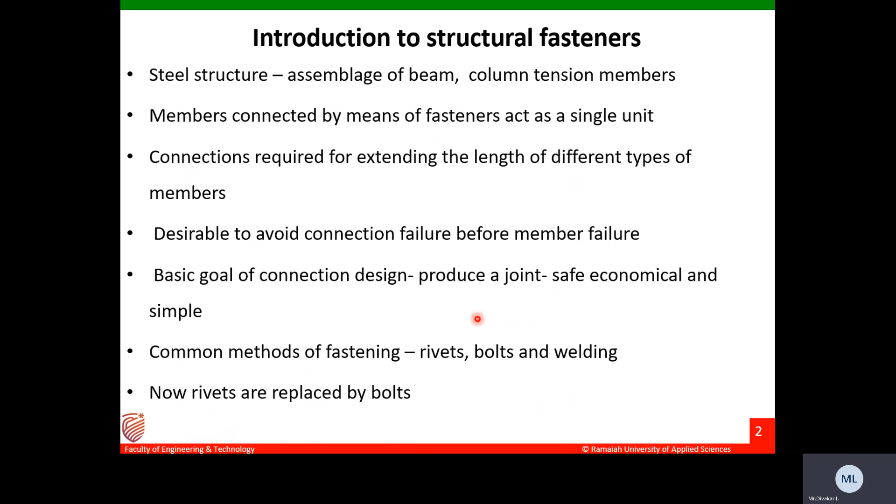If you want to give connections from beam to column or column to beam, we can use fasteners. If you want to provide the joint between the beams and columns, I can give bolt connections here. So beams and columns can be jointed by bolt connections.

Similarly, here you can see beam passing through beam, and beams connected by welding. Here beams and beams are connected by the weldings, as you can see at this point.

If you want to extend the members, what type of connections can we use? I can go with welded connections or bolted connections. Here you can see connections of two members using bolted connections.

In trusses, usually the connection is provided by using weldings. The tension members and compression members in trusses are connected by the welding process, though we can also use bolted connections there. This is how we use connections in steel structures.

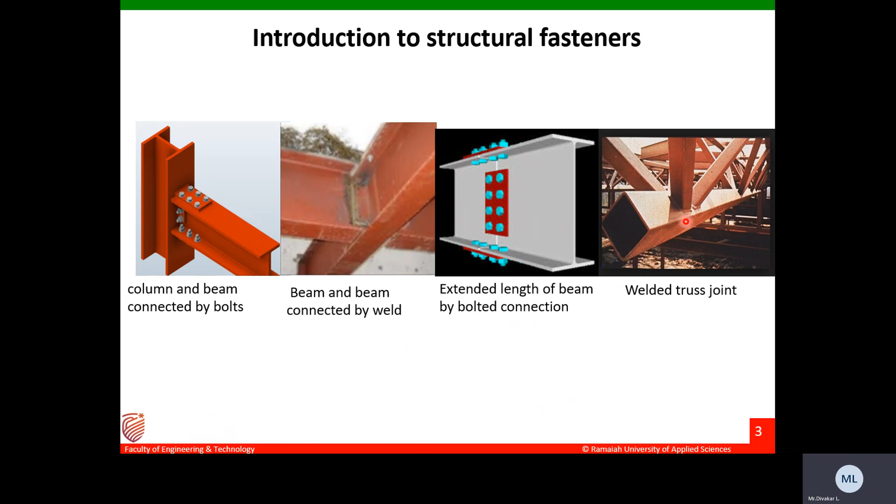Next, why connection failure should be avoided. If you are providing the connection, we need to take care that the connection failure should be avoided, because connection failure leads to catastrophic failure of the whole structure.

The connection failure is not as ductile as steel member failures. This is very important: connection failure is not as ductile as that of the steel members. The ductile property will be reduced and it behaves in a brittle kind of manner when compared to the steel members. At the connections, especially in the welding we provide, the failure type you observe is brittle failure.

Then, to achieve an economical design, connectors should develop the full or a little extra strength of the members being joined.

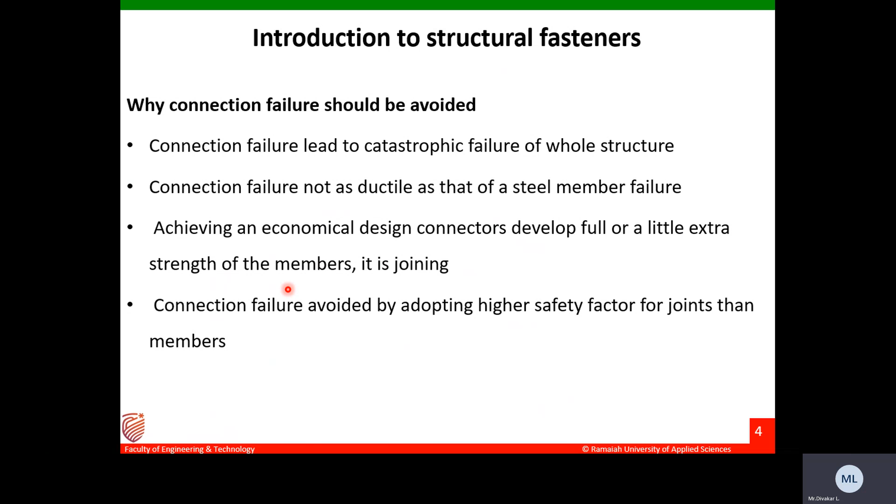Achieving an economical design, connectors develop full or little extra strength of the members. This is joining. Connection failure is avoided by adopting a higher safety factor for joints than for the members, so we can avoid these connection failures by using higher safety factors at the joints.

Next, classification of connections. There are different types of connections used in steel structures, with different methods of fastening. As said earlier, the first ones are rivets, bolts, and weldings. Now rivets are replaced by bolts, so commonly we use bolts and weldings.

Connection rigidity can be simple, rigid, or semi-rigid. Based on joint resistance, connections can be classified as bearing connections and friction connections.

Fabrication locations: shop or field connections. This refers to where you are fabricating the elements or joints - whether shop or field connection - and this should be taken care of. For example, in welding, you need to take care whether it is done in the field or in the shop.

Joint locations: beam to column, beam to beam, or beam to foundation. Based on this, we can classify the connections.

By method of fastening, we classify rivets, bolts, and weldings. Based on connection rigidity, we classify simple, rigid, and semi-rigid. Based on joint resistance, we classify bearing connections and friction connections.

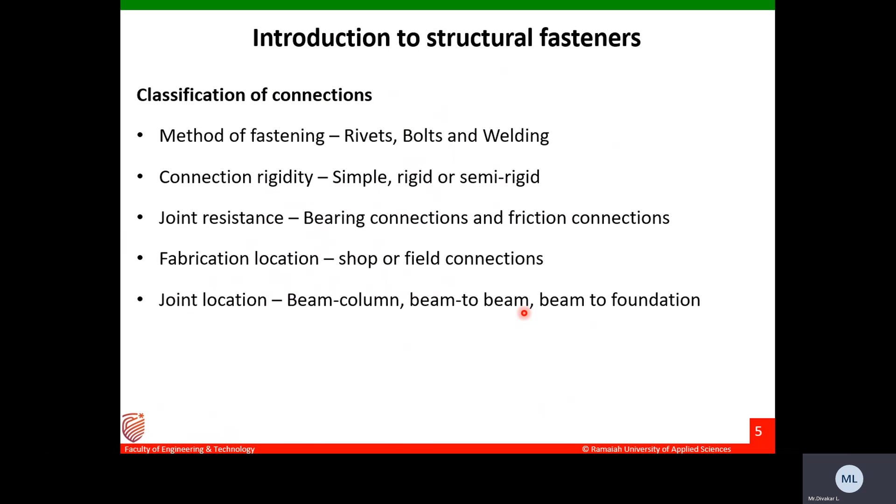Here I've shown a flow chart for classification of connections: simple connections and eccentric connections, bolted connections and welded connections. In bolted connections, there are common bolts and high strength bolts - these are the two commonly used types. Among high strength bolts, there are slip critical and bearing types. In welded connections, there are fillet weld and groove weld. This chart shows the two types of connections.

One type is eccentric connection, which I can also call bracket connections - eccentric connections are bracket connections.

Simple connections include bolted connections and welded connections. In bolted connections there are common bolts and high strength bolts, and among high strength bolts there are slip critical and bearing type bolts. In welded connections there are two types: one is fillet weld, another is groove weld, sometimes also called butt weld.

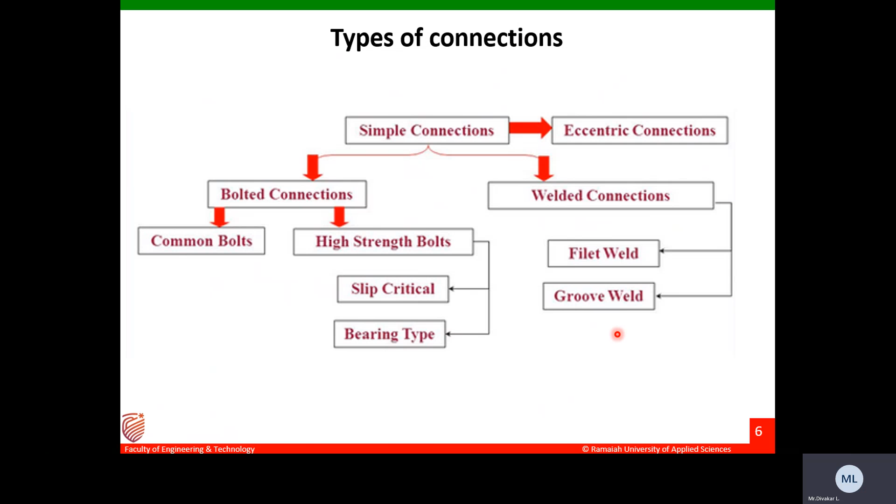Now let us look at bolted connections. What do you mean by a bolt? Let's concentrate on bolted connections first. A bolt is defined as a metal pin with a head at one end and a shank threaded at the other end to receive a nut.

You can clearly see this is the head, and this is the bolt - the total assembly is called a bolt. Here you can see the head, and this portion is usually called the shank.

This portion, from here to here, is usually called the shank. This is non-threaded shank and this is threaded shank - you can see the threads provided here. Shank portion is threaded at another end. Usually bolts are half threaded and half non-threaded, so the non-threaded portion is called shank, and the total portion is called shank, while the other part is the threaded portion.

In bolt assembly, if you take the total length of the bolt, this is called a nut, and these two are called steel washers. Washers are provided before putting the nut on, to get a better grip. So this is the total bolt assembly - here to here is the bolt length.

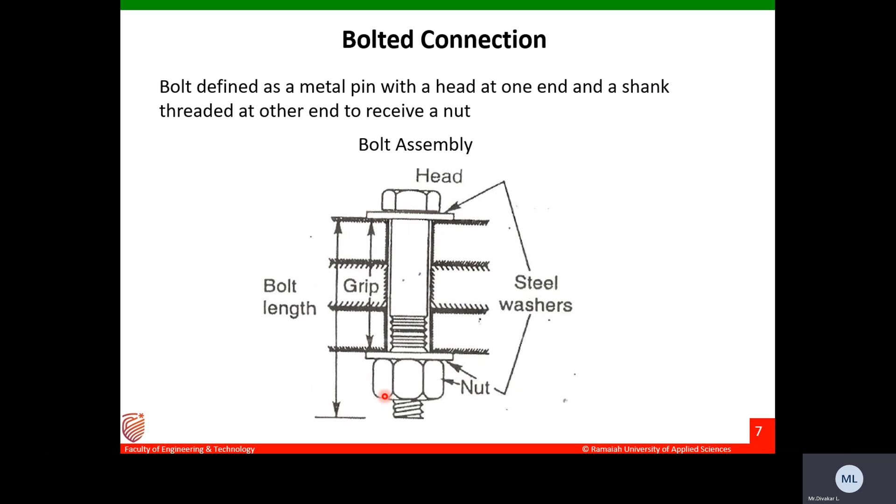Next, classification of fastener holes - this is given in Table 19 of IS 800:2007. What clearance should be provided for fastener holes? That should be known. Bolt holes are usually drilled, and bolt holes are made larger than the bolt diameter - this is very important.

Usually bolt holes are made larger than the bolt diameter - we need to take care of this. Why provide a larger diameter hole? Because it facilitates proper erection, and allows for inaccuracies in fabrication.

For example, take an 8mm bolt. While fabricating, there may be a slight change in diameter - it may be more or less than specified. To allow for these inaccuracies, the diameter of the hole should be kept slightly larger than the diameter of the bolt.

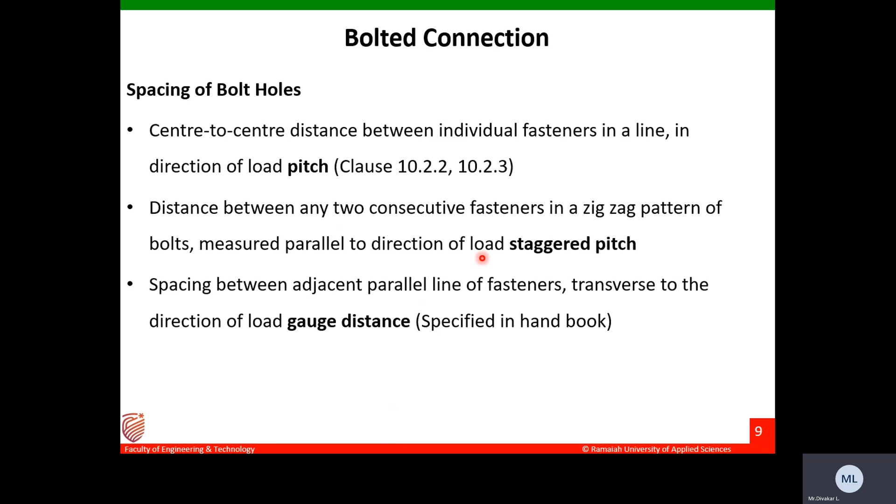Okay, gauge distance. Then edge and end distances of the bolts. Distance from center of a fastener hole to edge of element measured at right angles to the direction of load. Direction of load at the edge distances. This is placed in clause 10.2.4.

So you can see this is called edge distances. This is measured perpendicular to the direction of the loads. End distance is measured parallel to the direction of the loads, or in the direction of the load.

The distance from center of a fastener hole to the edge of an element measured at right angles to direction of the load is called edge distance. Then distance in a direction of load from center of a hole to end of an element is called end distance. It's very important.

So you need to remember this, it is very important. What is the end and edge distances while doing design? These are all the main important parameters you should remember.

What is that? Distance from center of a fastener hole to the edge of an element measured at right angles to the direction of a load. This is called edge distance, measured perpendicular to the direction of the load.

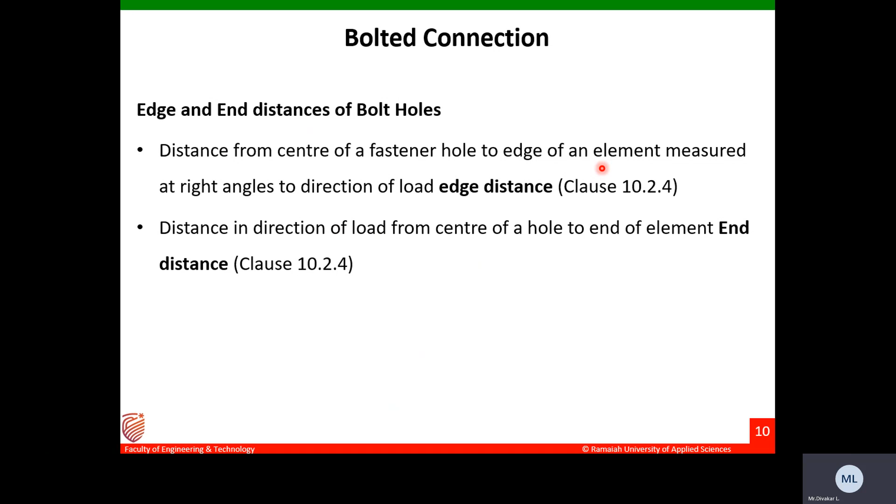Don't get confused between edge distance and end distances. This is given in clause 10.2.4 of the IS 800 book. We can go through it to clearly see what is the pitch, end distances, gauge distances, and edge distances.

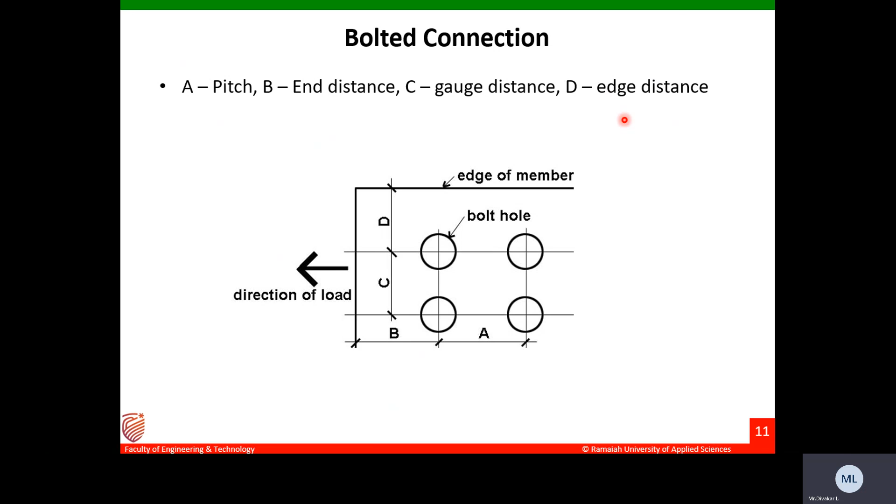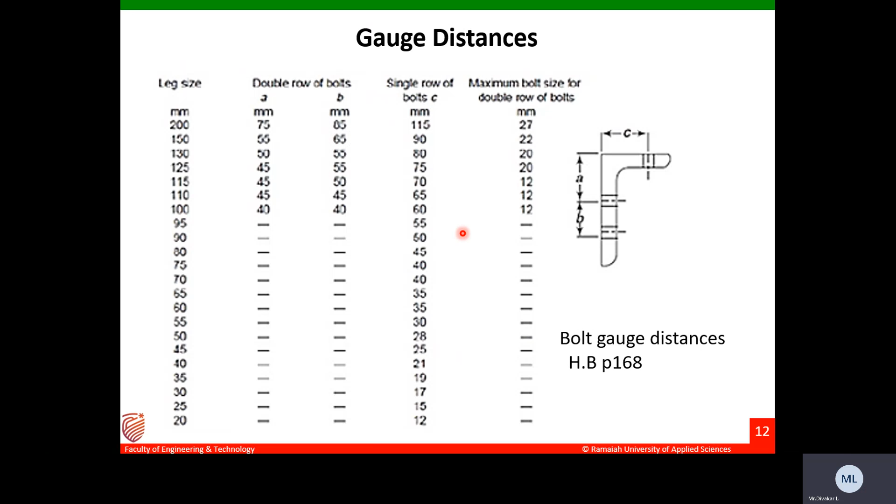Next, gauge distances. This is specified in SP6, page number 168. For gauge of bolts in angles, the gauge distances depend on the leg size, whether double row bolts or single row bolts are used. If you are providing only single row bolts, what should be the gauge distance? All these are specified in SP6 on page number 168. We can refer there to see what the gauge distance should be.

Now, bolted connections. Steel washers are provided under the bolt and nut to serve two purposes.

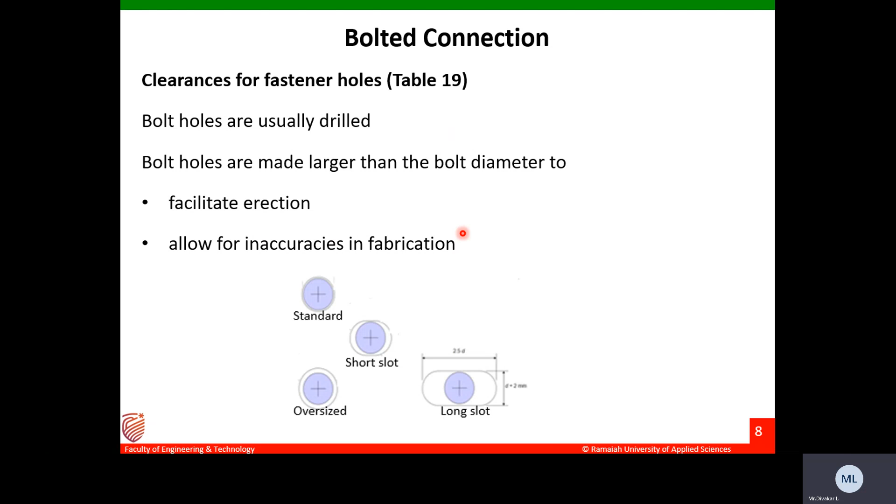Briefly, steel washers distribute clamping pressure on the bolted members, and prevent the threaded portion of the bolt from bearing on connected pieces, ensuring proper functioning of connections. Parts to be connected must be tightly clamped between bolt head and nut, and where the connection is subject to vibrations, the nut must be locked in position. If washers are provided, we can lock the nut and bolt properly.

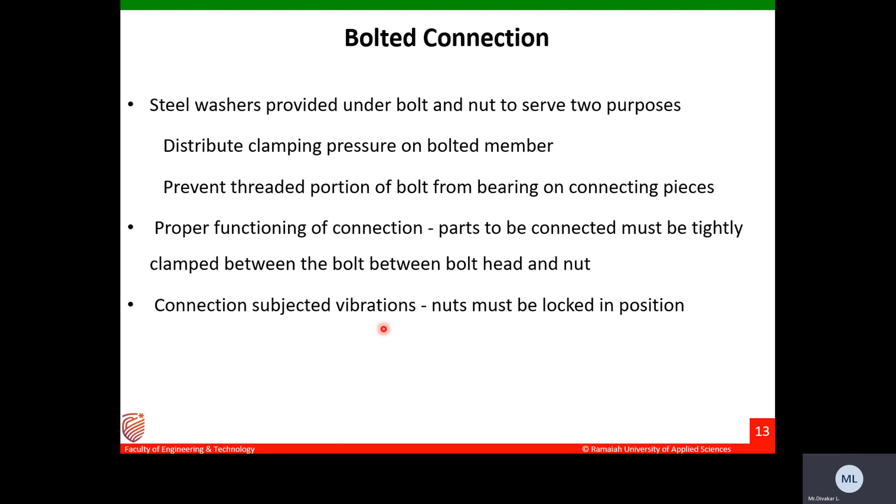Now let us concentrate on the various failures of the bolts. Bolted connections usually fail in 6 ways. Some failures are checked by adherence to the specification of edge distances - this is very important.

Now let us see shear failure of the bolts. To check the strength of the bolts, we need to check for shear and bearing strength. There are important failure patterns - it may fail in shear, in bearing, or in tearing of parts. All these we need to check.

Shear failure of the bolts occurs when the shear force in the bolt exceeds the design shear strength. You can see single and double shear failures - the shearing of the bolt happens when the shear force on the bolt exceeds the design shear strength.

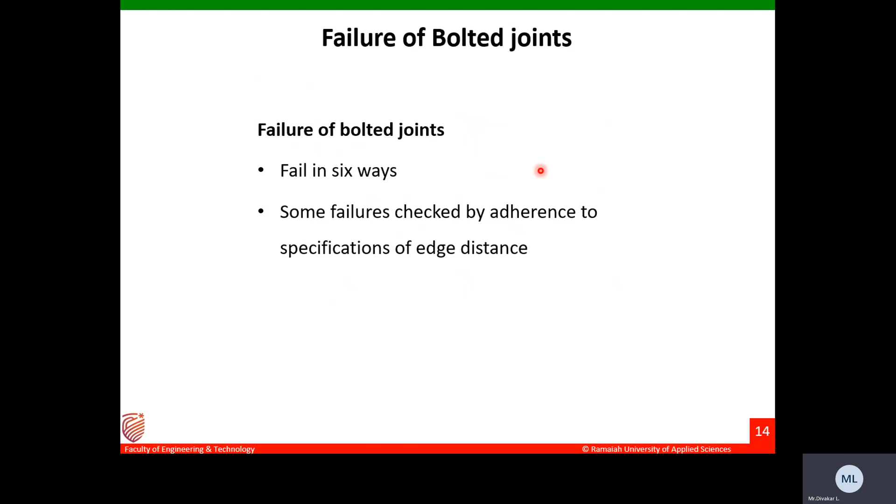The bolt may fail in shear, due to shearing of the plates or due to shearing of the bolts. You can see shearing of the bolts at some plane, either in shank portions or threaded portions. In this case, shearing of bolts can take place.

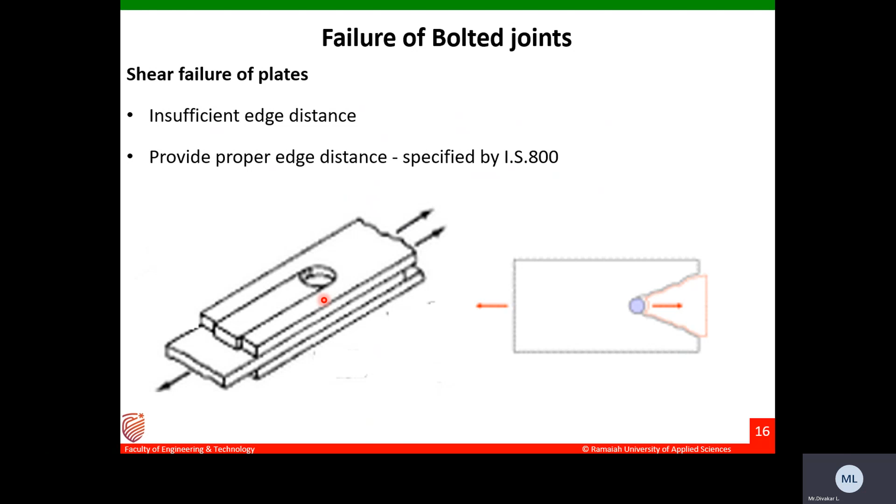Shear failure of the plate can also occur. If insufficient edge distance is provided, shearing of the plates can also appear.

If the tensile strength of the plate at net cross section is exceeded, tearing failure occurs. Or if the bolt is stronger than the plate, tensile failure of the plates can occur.

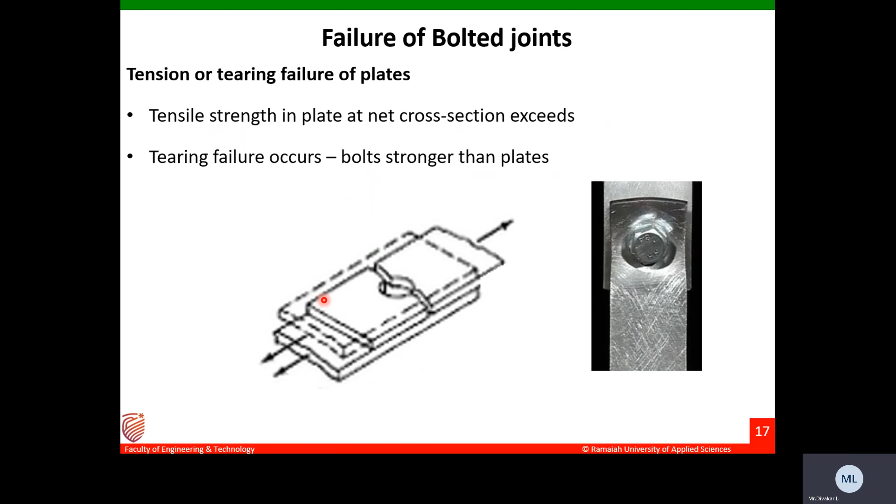Splitting of the plates can also occur. If you do not provide proper edge distance, you can see tearing of the plates near the end or edge, because no proper edge distance is provided.

Then there is bearing failure of the plates. The plate may be crushed when the bearing strength of the plate exceeds the design bearing strength, so crushing of the plate may occur.

Next is bearing failure of the bolts. The bolt is crushed around half its circumference because the plate is stronger in bearing, and the heaviest stressed plate may press against the bolt. At that time, you can see bearing failure of the bolts.

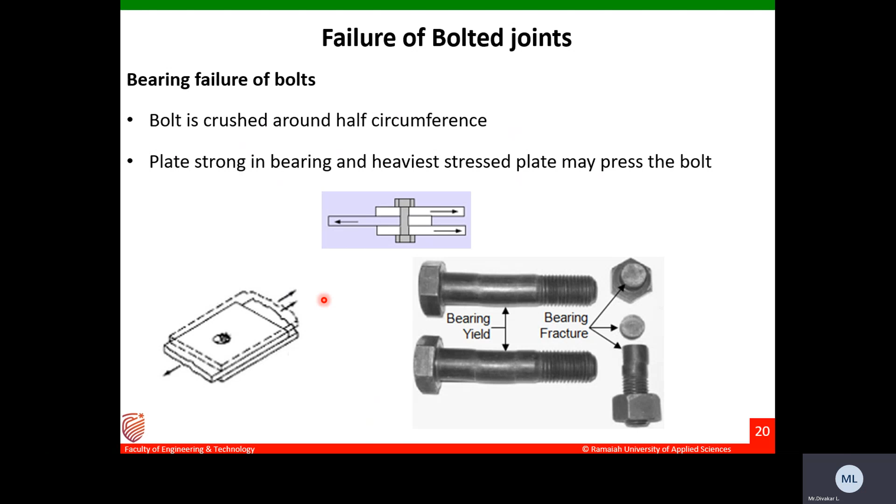Now let us see the types of bolts. What are the different types of bolts? Here we have different types of bolts used for connection purposes.

Unfinished bolts, also called black bolts or C grade bolts, as per IS 1363/1992, are used for bearing type connections. Then turned bolts, which are expensive and used in special jobs.

Turned bolts are expensive and used in special jobs. Precision A grade and semi-precision B grade bolts, as per IS 1364/1992, are used when no slippage is permitted.

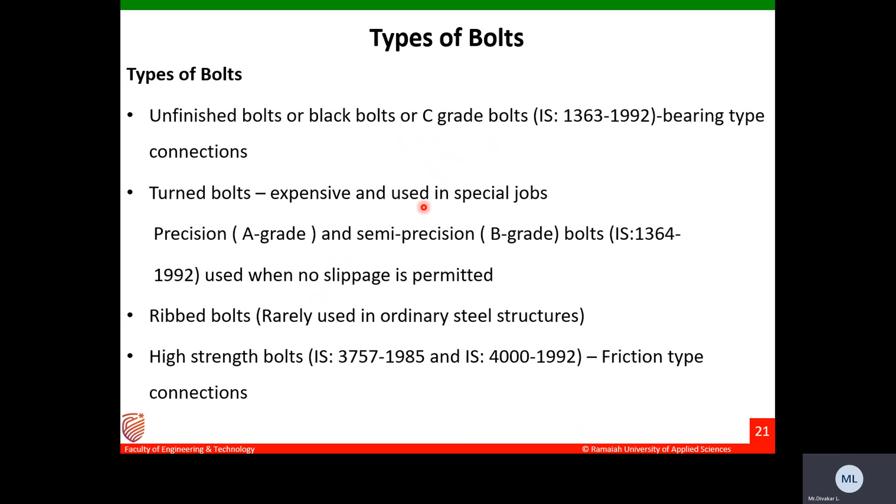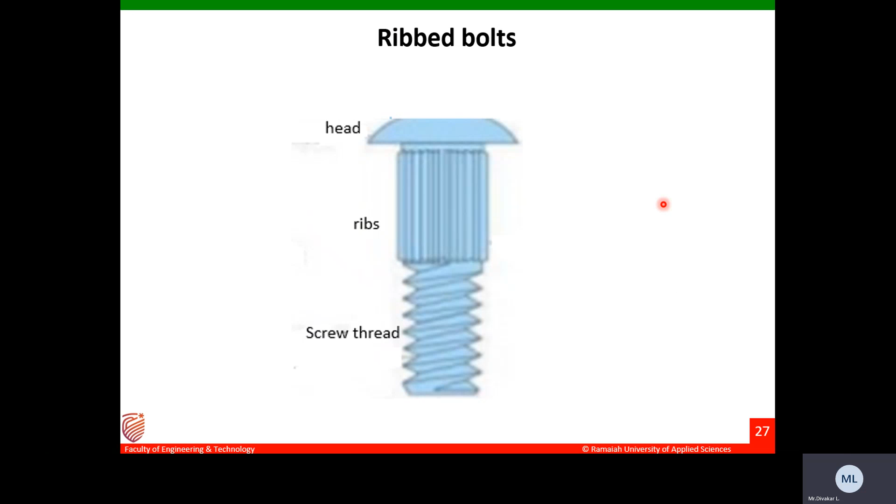Then high strength bolts - what are high strength bolts? High strength bolts are usually called friction grip bolts, made up of medium carbon steel, made from bars of medium carbon steel.

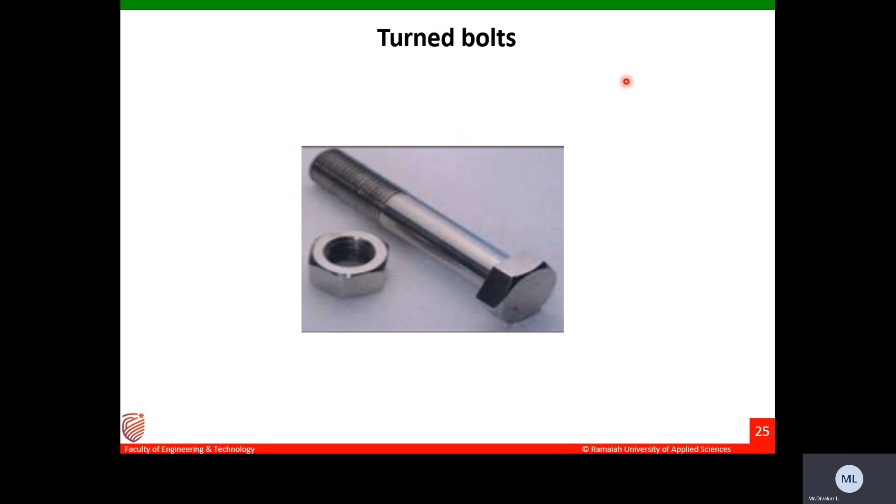Common bolts are made up of mild steel, while high strength bolts are made up of medium carbon steel, and high strength is achieved through quenching and tempering processes, or by alloying steel. Steel washers of hard steel or carburized steel evenly distribute the clamping pressure on bolted members and prevent the threaded portion of a bolt from bearing on connecting pieces.

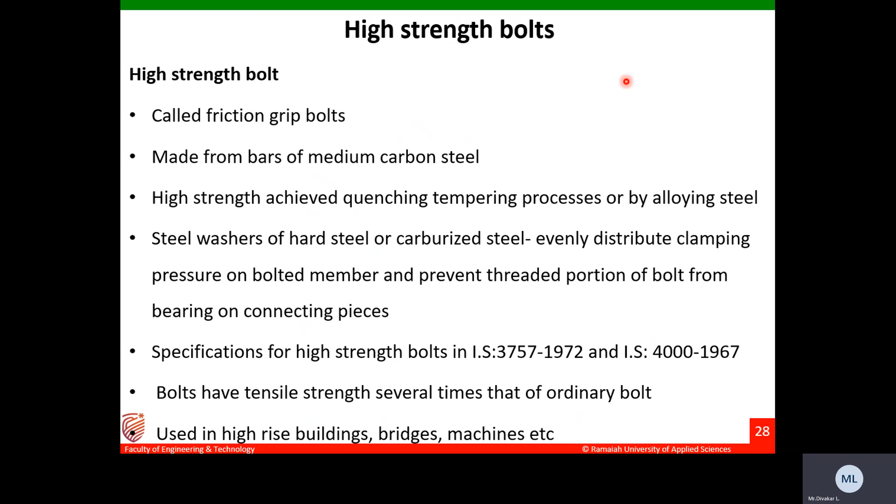The specification of high strength bolts is in IS 3757:1972 and IS 4000:1967. These bolts have high tensile strength, several times that of ordinary bolts, and are used in high-rise buildings, bridges, and machines, etc. So to remember: high strength bolts are friction grip bolts made from bars of medium carbon steel, with tensile strength several times that of ordinary bolts, used in high-rise buildings, bridges, and machines. They are identified by the manufacturer's identification symbol, which denotes the property classification.

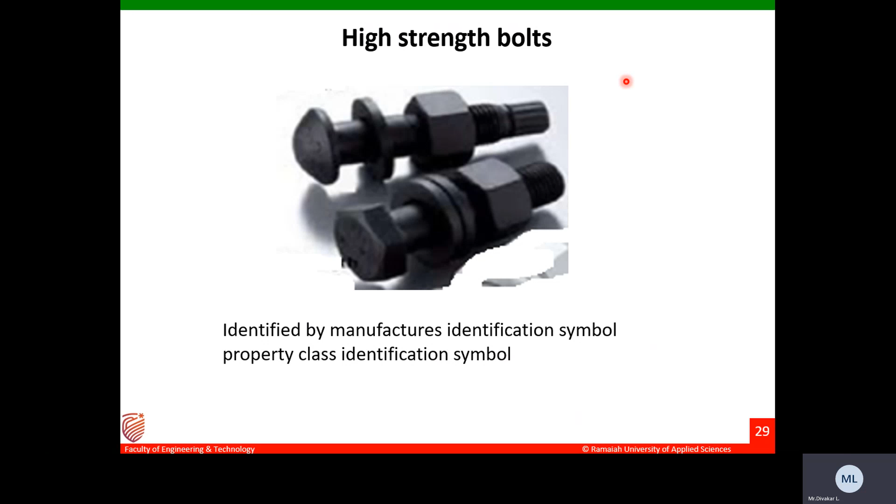Okay, these are all the high strength bolts. What are the advantages of these high strength bolts?

High strength bolts provide a rigid joint and no slip between the elements connected.

There is a large tensile stress developed in the bolts, a large clamping force to elements connected, and high frictional resistance developed.

That's why it's called friction type of bolts, also called friction grip bolts, because it provides high frictional resistance.

Because of the clamping action, load is transmitted by friction only, and bolts are not subjected to shear and bearing. This is very important - that's what high strength bolts are used for. Because of this, the shank portion of the bolt is not subject to much shear and bearing; that will be taken by friction only.

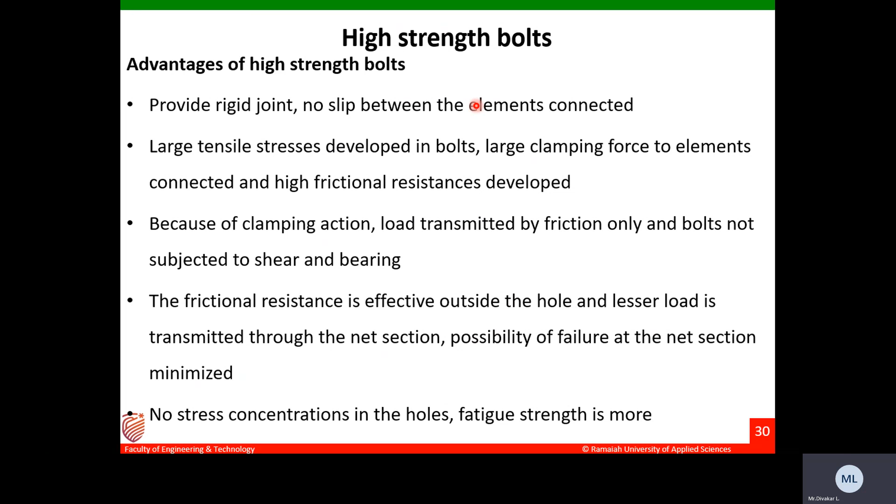There is no stress concentration in the holes, so fatigue strength is more. No stress concentrations can be seen in these connections. Then tension in bolts is uniform.

Bolt tension up to proof load prevents loosening. Only a few persons are required to make the connections, and thus the cost is reduced.

No noise nuisance is created - bolts are tightened with wrenches. This is very important: hazard of fire is not there, and no danger of tossing of the bolts.

Alteration can be done easily. We can do the alterations easily.

Principles of high strength bolts: the shank of the high strength bolt does not fully fill the hole. Shear and bearing are not critical for the load transmission - this is very important.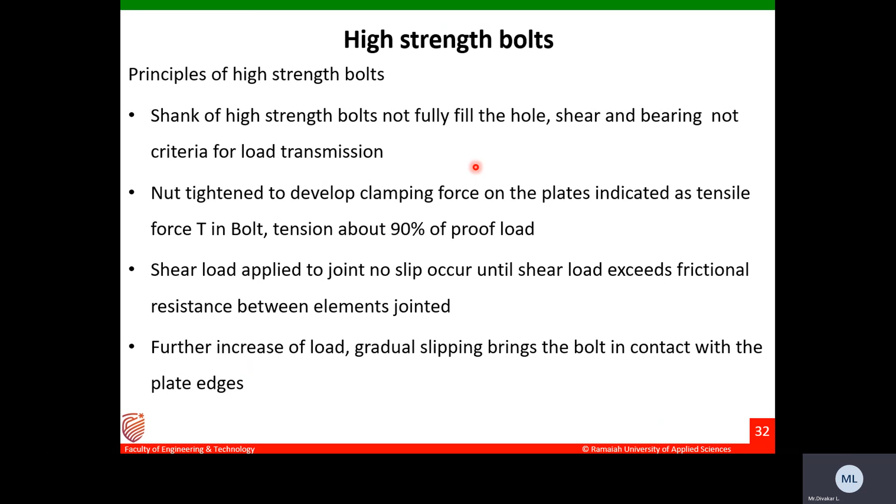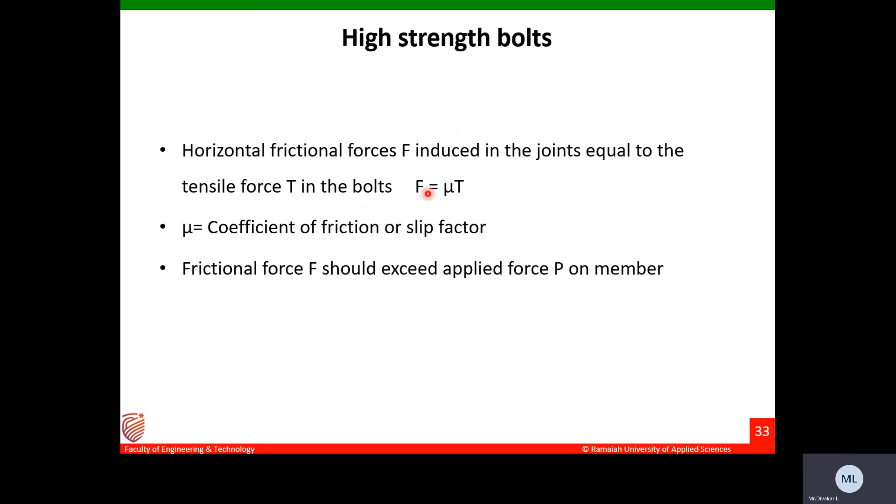The horizontal frictional force F produced in the joint equals the tensile force, so F equals mu into T, where mu is called the coefficient of friction or slip factor. The frictional force F should exceed the applied force P on the members.

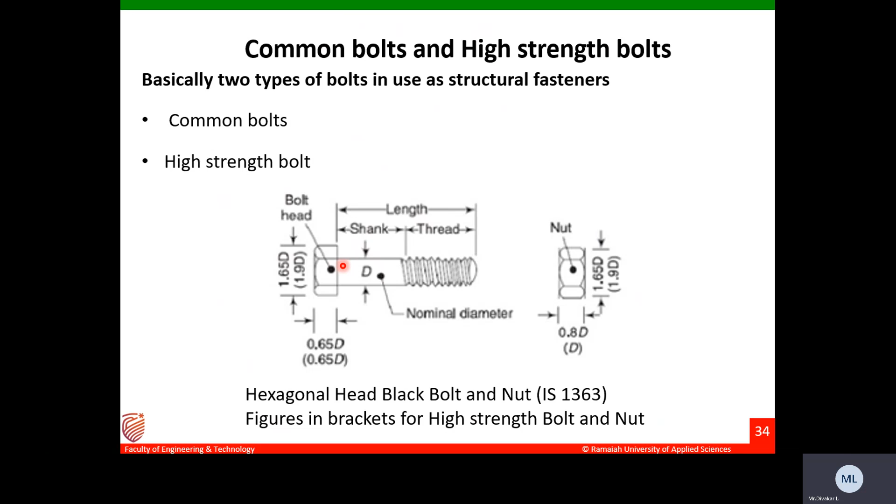So here, let's look at how force is transferred in bearing type of bolts. Let us concentrate now on how force is transferred in bearing type of bolt connections. I will show you a figure showing how force is transported and transferred in bearing type of bolts. Tension in one plate is equilibrated by bearing stress between the bolt and hole in the plates.

Then there's clearance between the bolt and the hole in which it is fitted. Bearing stress is mobilized only after the plates slip relative to one another and start bearing on the bolt.

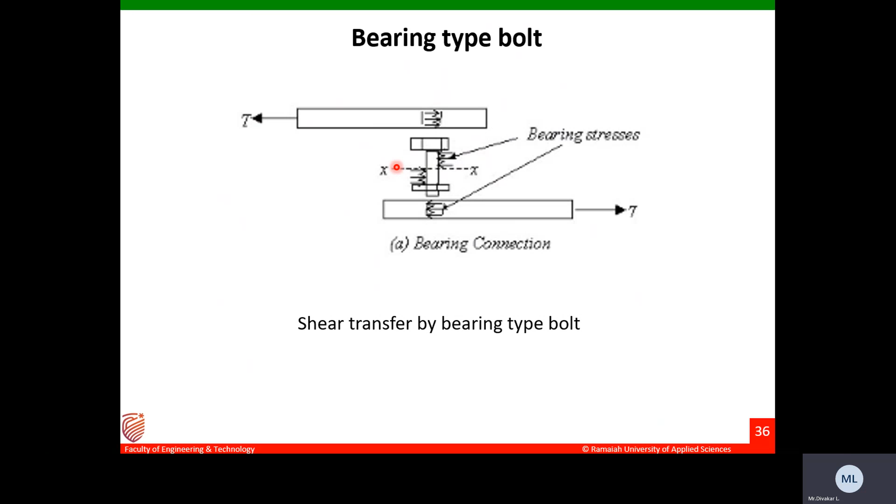So here, let's say this is a lap joint. You apply force and tension stress. When slip occurs, bearing stress develops at these portions, and at these cross sections bearing is observed. Shearing of the bolt can be observed at these portions. So a lap joint has only one critical section, while a butt joint has two critical sections.

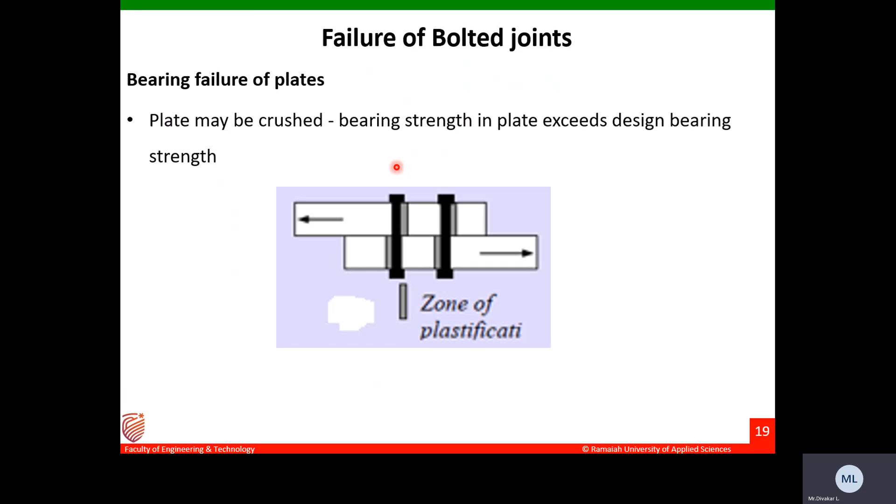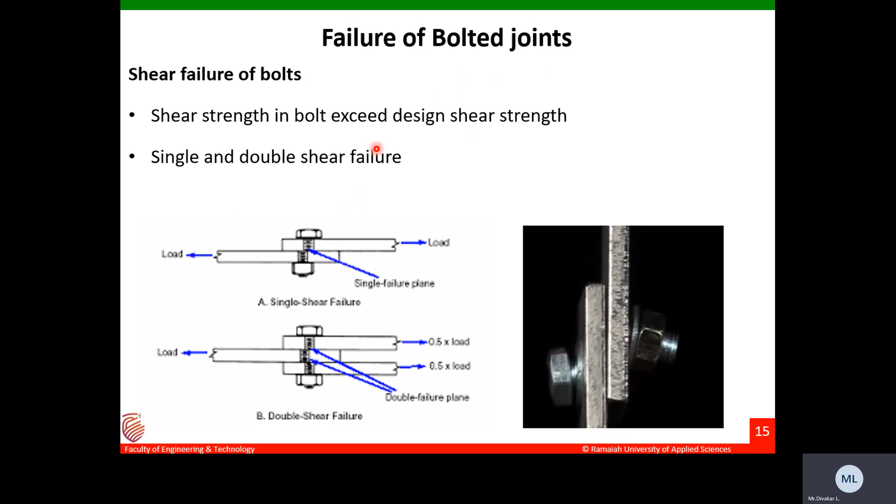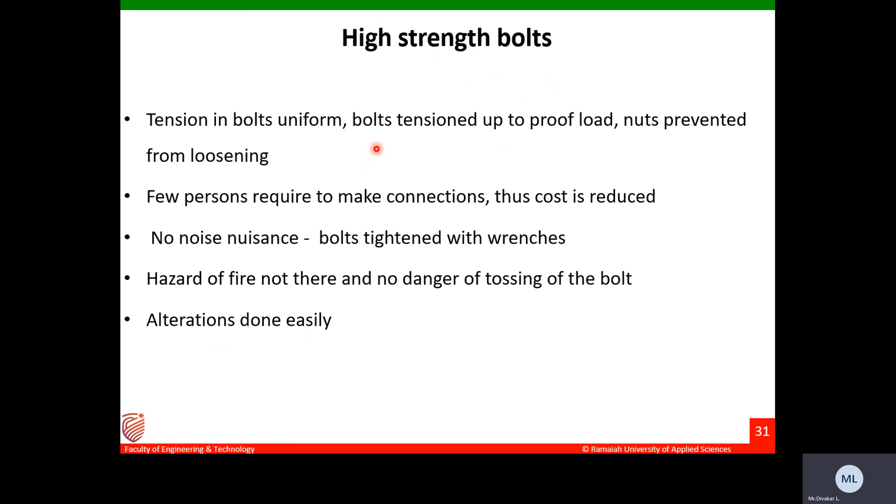Let me explain how many critical sections you can see when discussing the failure of bolts. Here you can see a lap joint has only one connection, only one critical section.

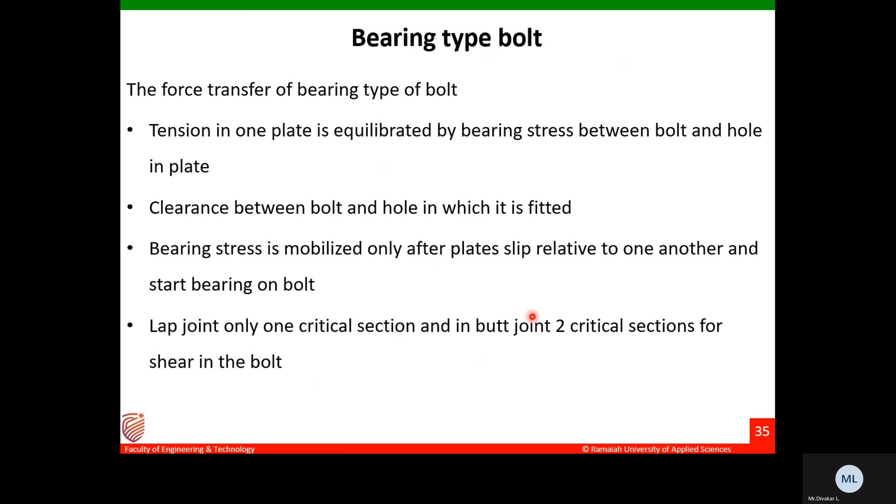Now, design shear strength of bearing type bolts. The failure of connections with bearing bolts in shear involves failure of the bolts or the connected plates. The behavior is linear until yield takes place at the net section of the plate under combination of tension and flexure. Shearing takes place at the bolt shear plane.

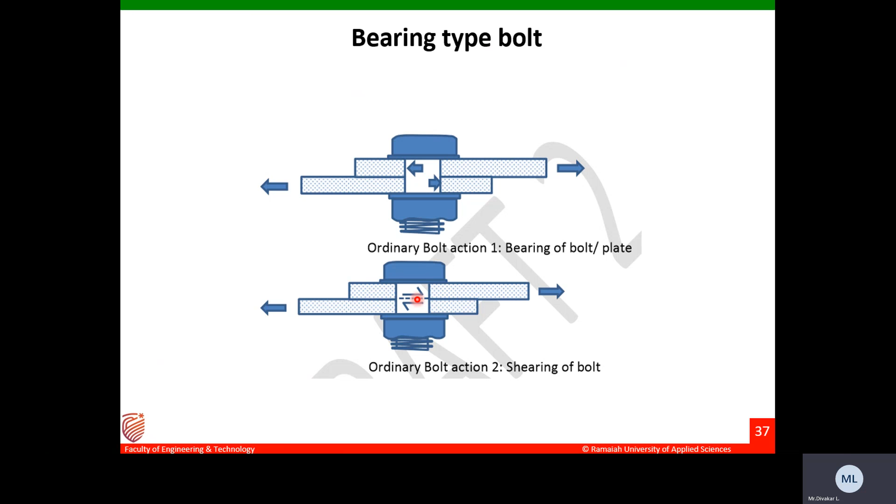When bearing stress exceeds these limits, shearing of the bolt will take place at these portions, at the bolt shear plane. When two plates are connected like this, it is called the shear plane. So when you apply force in these directions, failure may occur at those portions, causing shearing.

Failure of the bolt can take place in bearing when the plates are made of high strength steel. So when the connecting members are high strength steel compared to the bolts, bearing failure of the bolt can take place. Conversely, failure in bearing takes place in the plate when the plate is weaker than the bolt.

Please remember, there are generally three types of failure seen in bolts: shear failure, bearing failure, and tearing failure of the plates. When the strength of the plate is more than the bolt, there is bearing failure of the plate and bolt. When the strength of the bolt is higher than the plate, as explained earlier, there is bearing failure of the plate.

So block shear failure also occurs. Okay, then design strength of the bolt, design strength of the bolts.

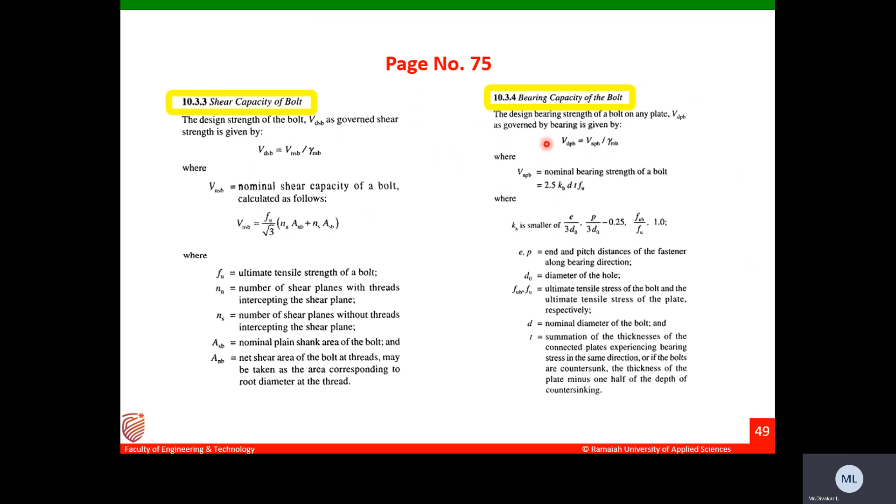Based on this, I can check the shear and bearing capacity of the bolt. I already explained that the bolt may fail in shear or bearing. So if you are checking for the bolt joint, then I need to check for the tearing or rupture strength of the plate also.

Rupture strength of the plate is given in page number 32, clause 6.3.1. So we need to check the rupture strength, or tearing strength, of the plate. When talking about a bolted joint, we need to check even the connecting members and their strength.

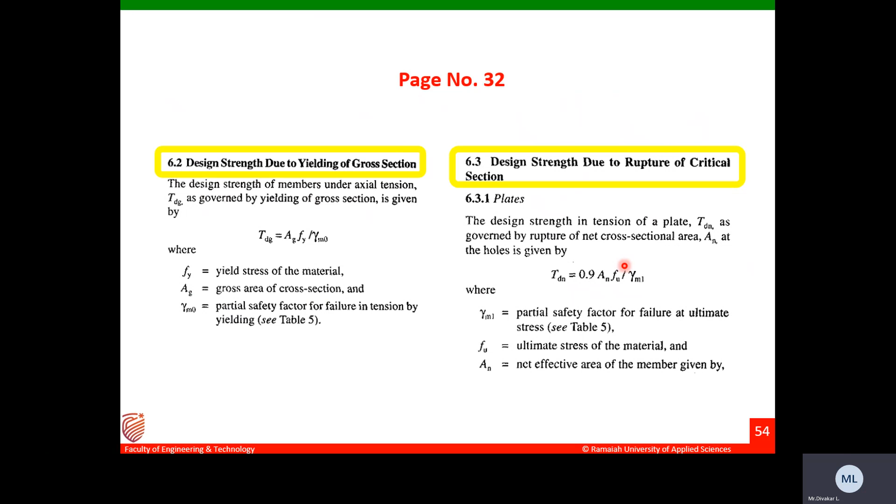We need to check the design strength due to rupture of the critical sections. Here I can find TDN equals 0.9 into AN FU by gamma m1, where gamma m1 is the partial safety factor, Fu is the ultimate strength of the material, and AN is the net effective area of the members. AN can be calculated using this condition.

Let us say this is a zigzag pattern of connections, bolted connections. These are the critical sections where tearing or rupture of the plate can occur, along this path.

Ruptures can occur along this path, so we use the formula with summation of PSI squared by 4G into T. If I have only one column, like one hole here, one hole here, along one line or one column, and if all the bolt holes are present in a zigzag pattern, versus if the bolt holes are in only a single line.

Let us take the example of this single line, where members 1, 2, 3 are connected. Then the formula can be altered to AN equals B minus N into DH into T, because the zigzag term won't apply here.

Here B and T are the width and thickness of the plate. N is the number of holes along the critical line, and DH, sometimes also called DN or D naught, is the diameter of the bolt holes.

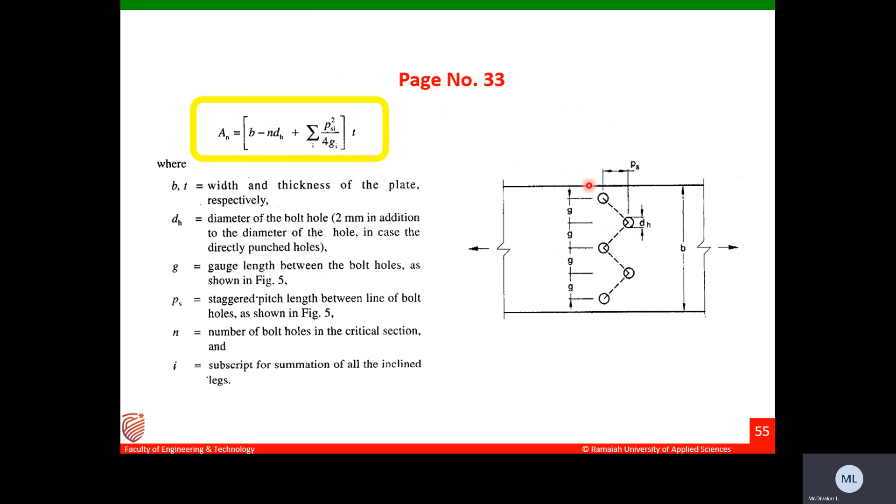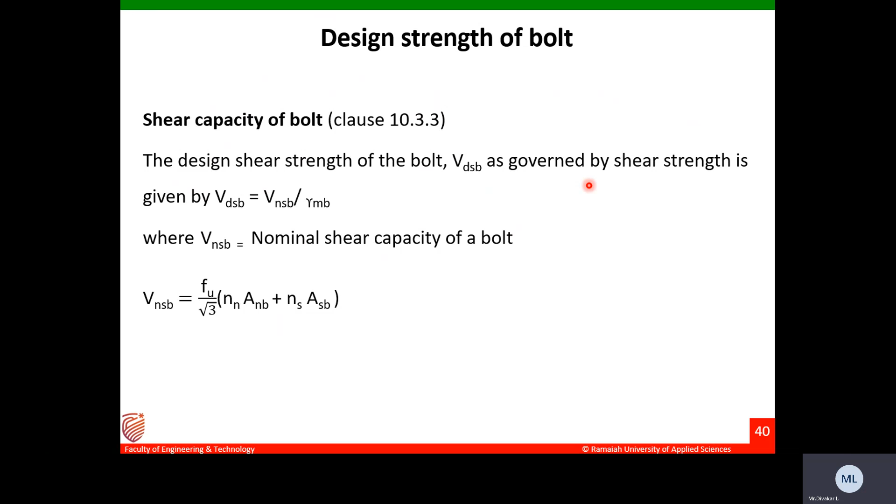This is how we check the strength of the bolts. The same is given here: tension capacity, bearing capacity of the bolts, and shear capacity of the bolts are all provided.

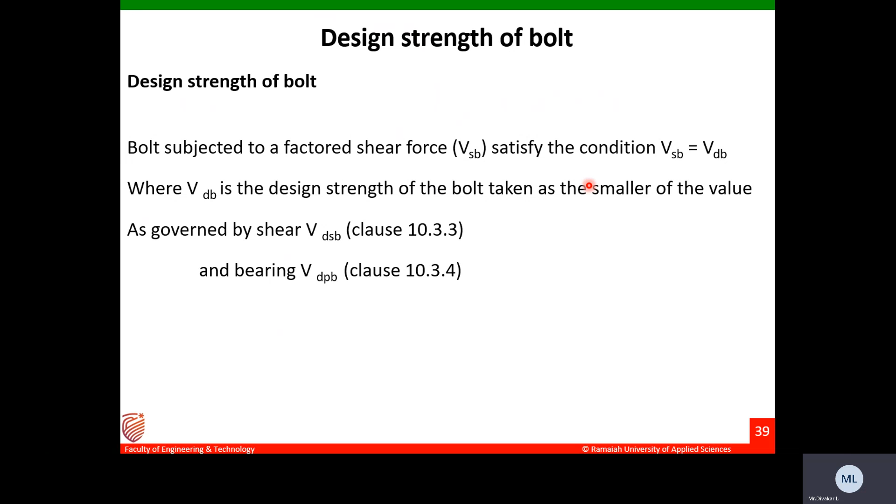This gives the design strength of the bolts, VDB. As explained earlier, we need to check the shear capacity of the bolt and the bearing capacity of the bolt, as given in clause 10.3.4, page number 75. Next we check the tension capacity, or rupture capacity, of the plates. Whichever is minimum will be taken as the design strength.

This is the strength of the bolt, sometimes called the strength of the bolt joint. So in designing the bolt, we first check the bearing capacity and shearing capacity of the bolts, and the rupture capacity of the plates.

If you are finding the efficiency of the bolt joint, we need to find all three values and determine which one is minimum. That will be your bolt strength, or bolt joint strength, for the bolted connections.

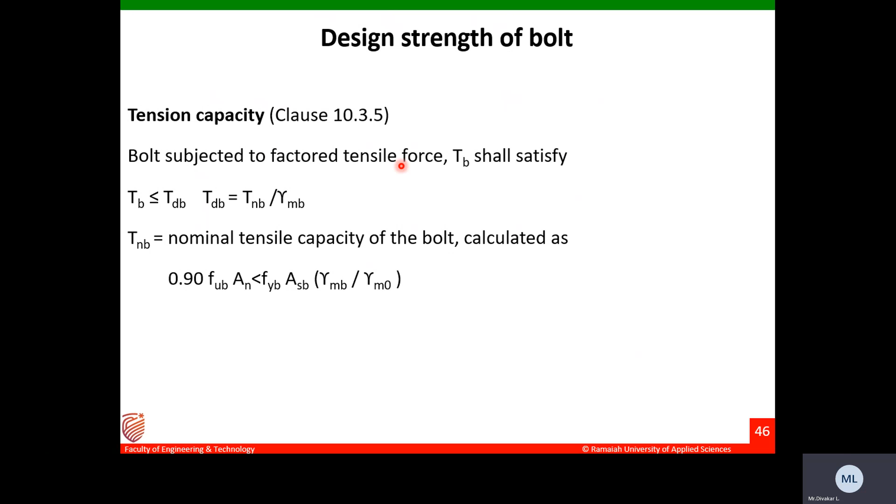So we can find the strength efficiency of the bolts. If you know the gross section and net gross area, the strength of the solid plate, then bolt value divided by the strength of the solid plate, or strength of the bolt joint divided by strength of the solid plate, gives the efficiency of the bolted connection.

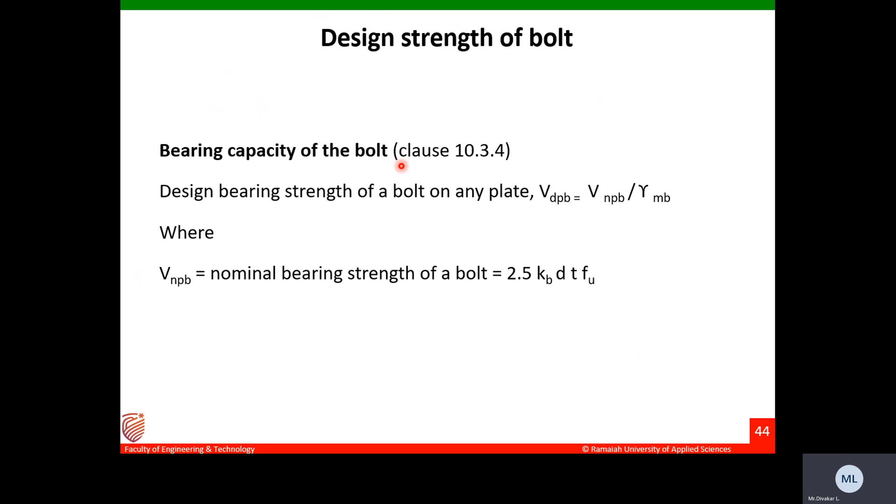This is how we need to find it, guys. During designing, we'll clearly come to know these terminologies. I hope you understood this. In the next class, we'll continue with the design of bolted connections. Thank you, guys.